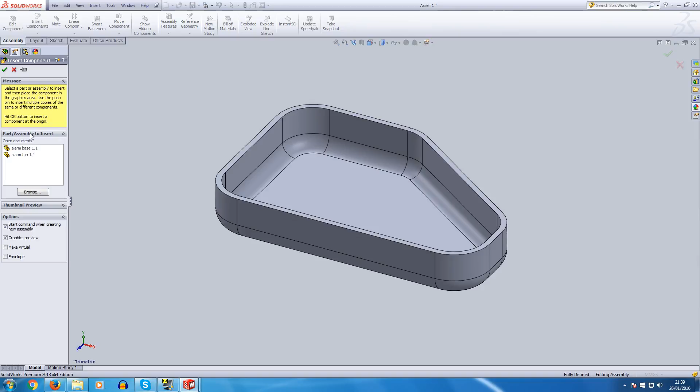So I'm going to start with Alarm Base. I'll click on there and drag across. Single click and drag across and let go. So my base is now part of the assembly. At which point I go back to Insert Components. I pick Alarm Top, and I can drag that in and place it wherever I like.

Okay, now these two bits won't line up properly, so you might want to align them to get them looking correct. The method for that is a tool called Mate. Select the front face by clicking on it, press the Shift key, which is the up arrow, and hold, and click on the matching face on the bottom part. Those two are now highlighted.

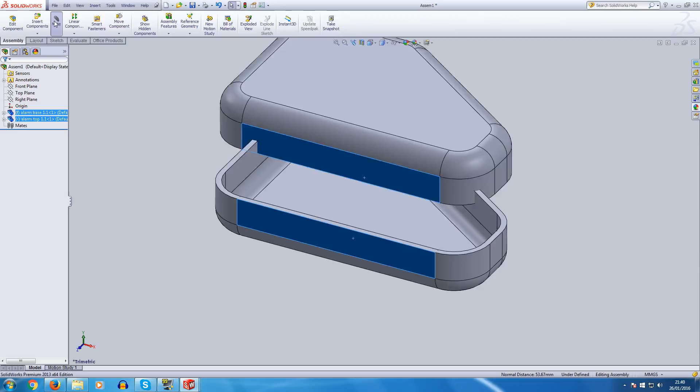Up on the top left you will have this tool called Mate. When you click on it, it will simply align those. So those are now aligned, and it's done that on a tool called Coincident, just there. The next thing you want to do is close that so you don't accidentally change it.

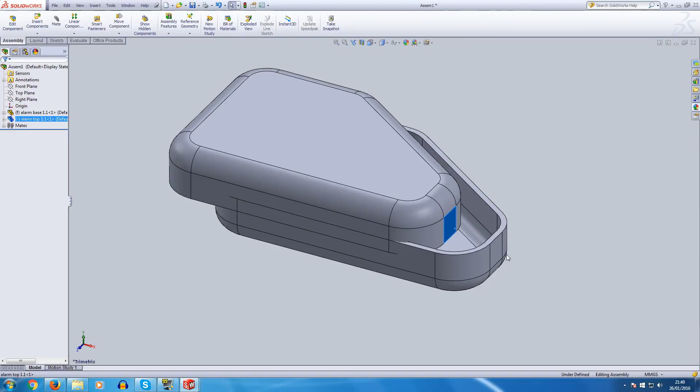We're going to do the same again on these two end faces, the matching ones there and there. So again, click and select, then the Shift key, which is the up arrow, click and select again, Mate. It will assume you want to line them up coincident, like that again, so that's fine. Green tick, green tick. So those are now lined up.

You can still pick this part up and drag it vertically. So you can do an exploded view quite easily. But it's lined up by that face and that one, and the ones on the end, so that it can't swing into a different position. It only moves up and down. You can do a third mate, which will allow you to position a specific distance apart. I'll show you that now.

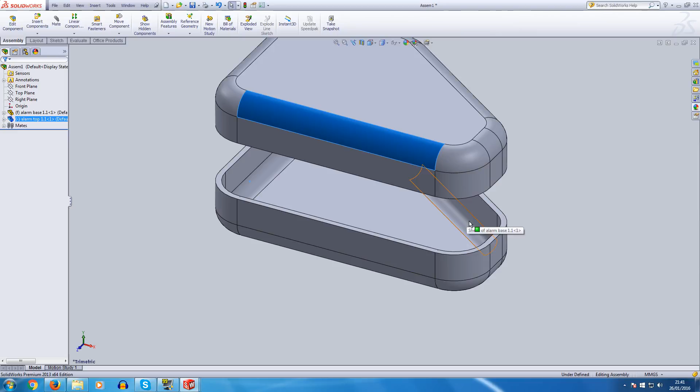Use the arrow keys until you can see the face, which is the edge of the top. So I've got that, click it and select it, it's all gone blue. Use the down arrow key so I can see the other one on the base. Shift key to make sure you've got them both selected. Highlight that. Now they're both selected. If we go to Mate, it brings them together. It assumes you want them to touch.

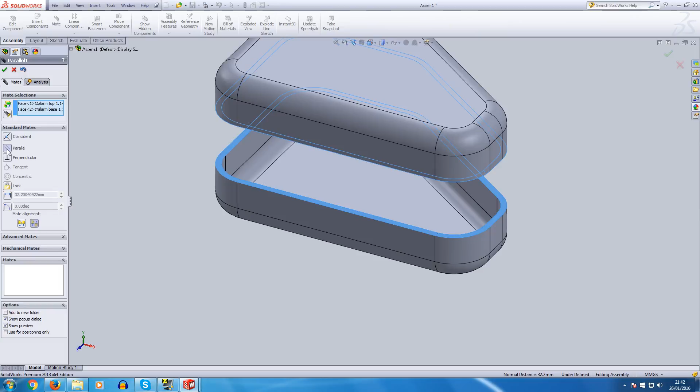However, you could choose Parallel, that one there, and then when you click on this distance, you can then choose how far apart. I'm going to put in 25 millimeters, and it will move it to 25. You can go back and edit that at any time to change the distance they are apart. So if you want it exploded, you can move it apart. If you want it closed, you can move it together.

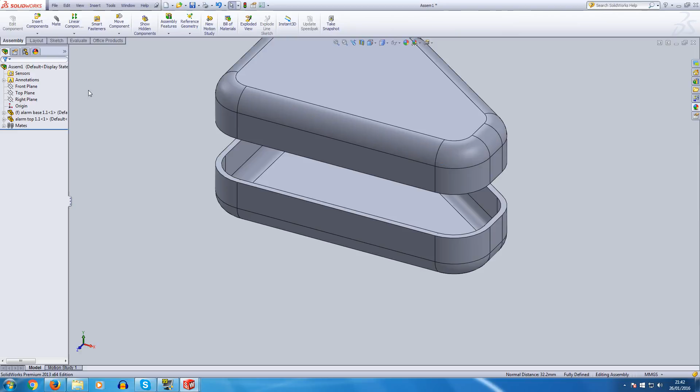At this point, you should save your assembly as Alarm Assembly 1.1.